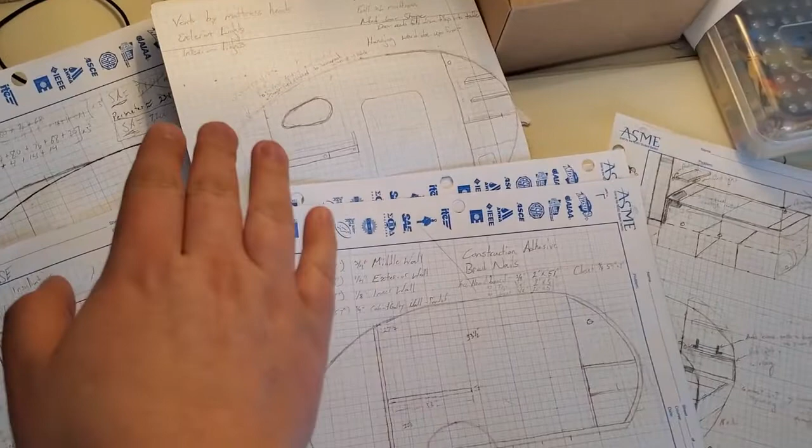Here are some of our initial sketches. We started drawing this one probably a couple years ago. We love that shape, but as you can see, we're building a bunk bed for the boys, and we wanted to give them a little bit more room, so we updated to this shape. Maybe when we kick the kids out of the house, we'll do that one in like 18 years.

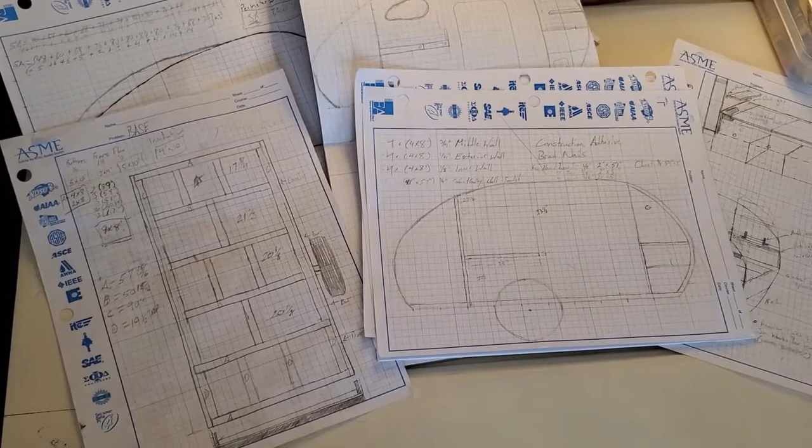Yeah, we're doing a 5x10 trailer. It took us a while to find one, but that's what we wanted. James is like 6'3", I'm 5'10". We're pretty tall, we wanted plenty of sleeping room in there and still have some room for the galley. The main thing we're working on right now is this, we call it tons of things: floor box, space box, insulation box.

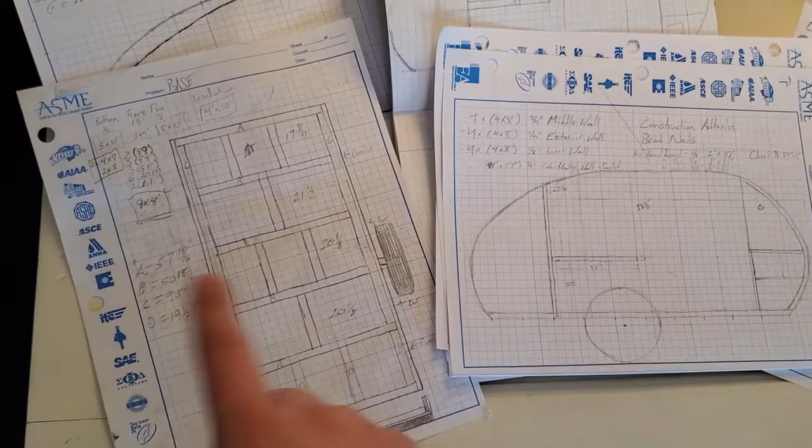A 5x10 trailer is going to have a couple different problems. Instead of being able to do a 4x8 sheet, we have to do like 3 sheets of plywood here. We'll have to do multiple sheets of plywood for the walls. We got some 2x4s we're laying down, insulating this. Mentioned a couple times, we live in North Dakota, you'll see that. So yeah, insulating the floor and the walls, and we're excited to get started.

Okay, so getting the sideboards off was easy, and then I had to take these boards off. I was just going to take the screws and unbolt them from the frame, but quickly abandoned that idea when I couldn't even get to the heads of the screws. After some deep thinking, I grabbed the saw and knew I was just going to have to cut them all out. Well, maybe not so quickly, because you're going to come back here and rethink, which is my favorite part.

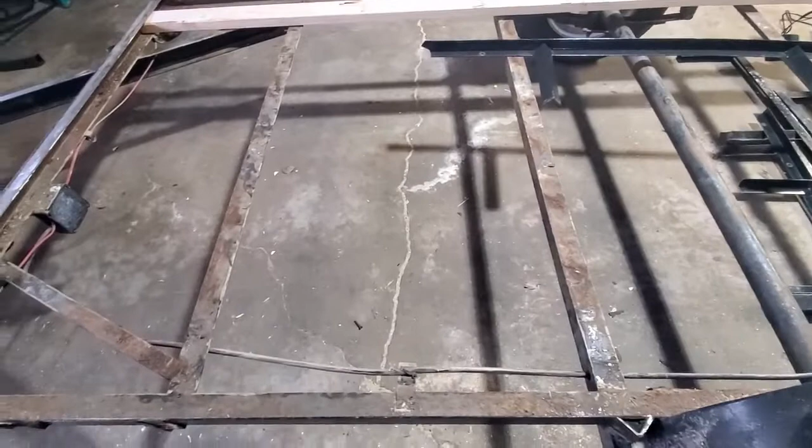Once we got all the boards off and it was time to clean up, I used a 4.5-inch angle grinder with a cutoff disc to cut off all the extra bolts and the side rails and all the welds there, and then just an abrasive wheel to clean off all the rust, getting the frame basically smooth and neat.

We used just black exterior spray paint just to clean up the frame.

It was nice working with my neighbor to help weld a bar on there, because he told me about when they tore apart a 16-foot camper hard side, and it was all angle iron. They could basically take the opposite corners, push them down to the ground, and the frame would spring back.

Guys, it's all in the walls. The walls will keep it strong.

Our floor box used 2x4s laid flat on their side, connected with pocket hole screws, because drilling a 4-inch screw through the side of a board is a bad idea. It's hard to do, and it would probably split the board.

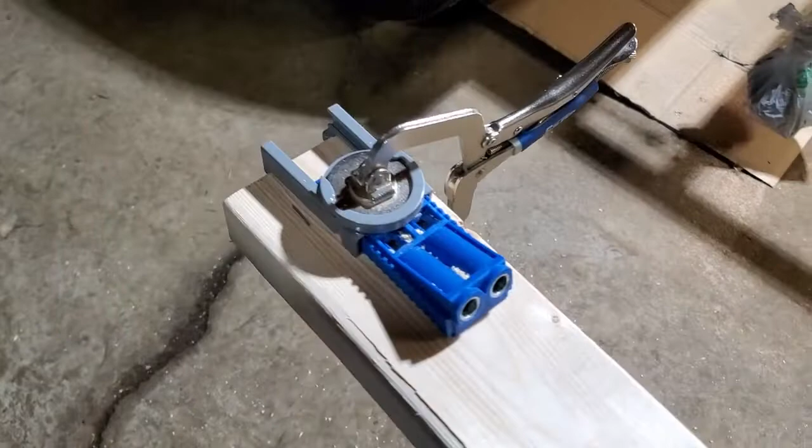So yeah, all the beams, I'm just working on getting pocket holes so we can put the box together and put insulation in between, and we'll see what we can get done tonight.

I was gonna try to paint the bottom of our base today, but it's 27 degrees. I could maybe paint the base today, but it's 26 degrees. I could maybe paint today, it's in the 40s, possible, but Owen's not napping well, and I have a job interview later, so not today.

Finally painting today. I'm using this black stain that we used for our fence posts last year. We had some leftover, and that's what we're using. The plywood's already green treated, but we wanted to do a little extra layer. We were planning to do just an exterior latex paint, but found this stain leftover and thought that'd be a good use for it.

Moving on to putting that 2x4 frame together. We're putting down some liquid nail and then some brad nails to help keep it in place, and those pocket screws we've been talking about.

We have spacers clamped on the side there, as we wanted to leave a little gap and have a little bit of that bottom plywood board for our wall to sit on. We'll probably show that more in the videos where we're building the walls.